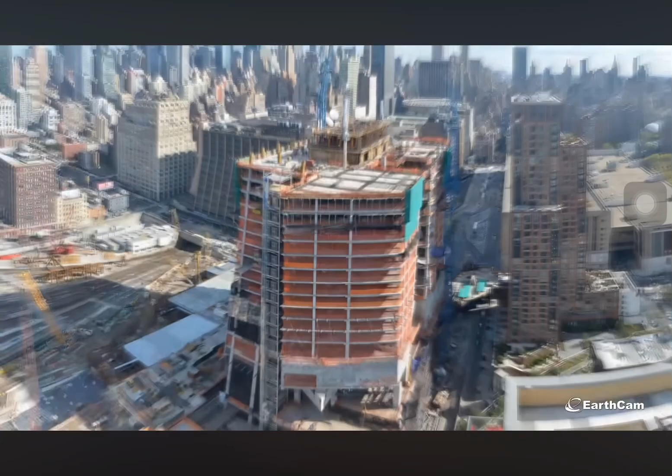Concrete has long been the foundation of modern civilization, from the bridges we cross to the buildings we live and work in. However, as our infrastructure ages, the challenges of maintaining and rehabilitating concrete structures become increasingly critical. Today, we are here to explore the transformative potential of the Future Concrete Rehabilitation Program, an innovative approach that addresses these challenges with cutting-edge technologies and sustainable solutions.

So why is this important? Concrete infrastructure represents a significant investment of resources and energy. Allowing structures to deteriorate not only poses safety risks but also has a profound impact on the environment. Current repair methods are often costly, labor intensive, and environmentally damaging. A revolutionary change is needed to ensure our infrastructure stands the test of time while aligning with global sustainability goals.

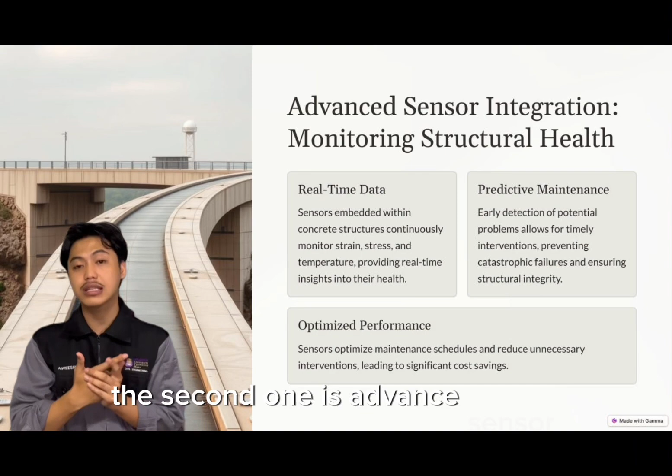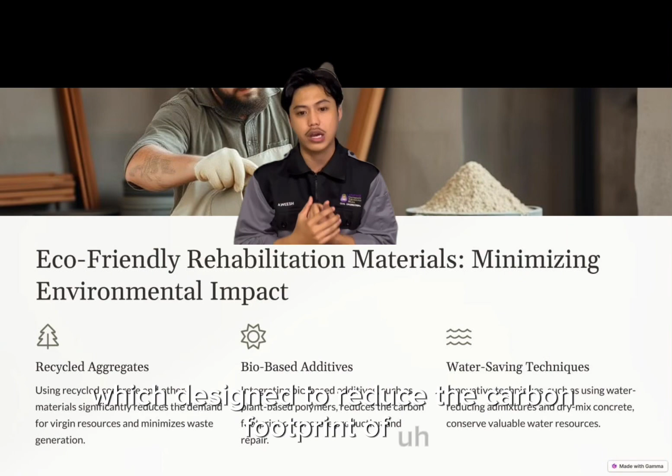In this presentation, we will cover three groundbreaking advancements in the field of concrete rehabilitation. The first is self-healing concrete technology, which repairs itself without human intervention. The second is advanced sensor integration, enabling real-time monitoring of structural health. And the last is eco-friendly rehabilitation materials, designed to reduce the carbon footprint of concrete repair processes. We will also discuss the societal and environmental consequences of adopting these technologies and how they align with Sustainable Development Goal 9, which is industry, innovation, and infrastructure. So let's get started by delving into the first revolutionary innovation, which is self-healing concrete.

For the introduction, self-healing concrete is a revolutionary technology that repairs cracks automatically, reducing maintenance costs and prolonging the lifespan of structures. As for the key innovation components, it uses bacteria or chemical agents that activate when cracks form in the concrete.

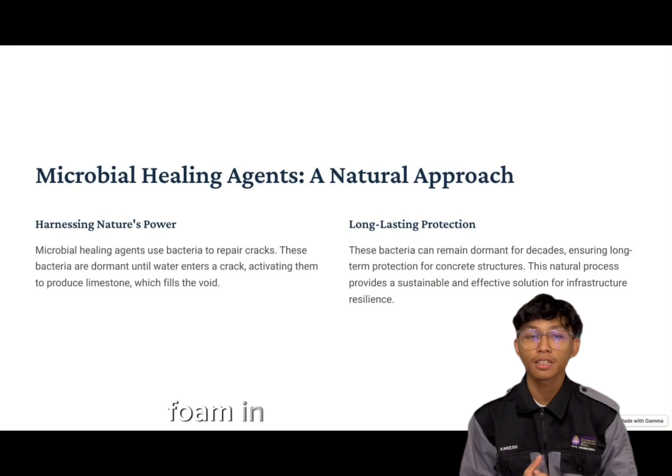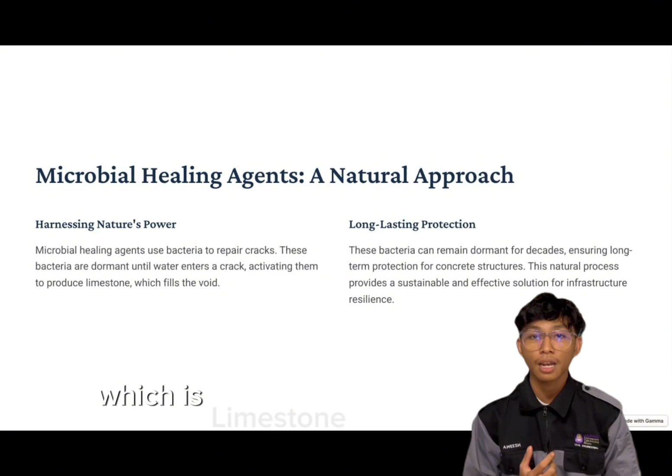Number 1, microbial healing agent, also known as the bacterial-based approach. When a crack forms and water seeps in, the bacteria are activated, consuming calcium lactate to produce calcium carbonate, which is limestone, filling the cracks. The advantages of this method: it is a completely natural process, and it prolongs functionality as the bacteria can remain dormant for decades until activated.

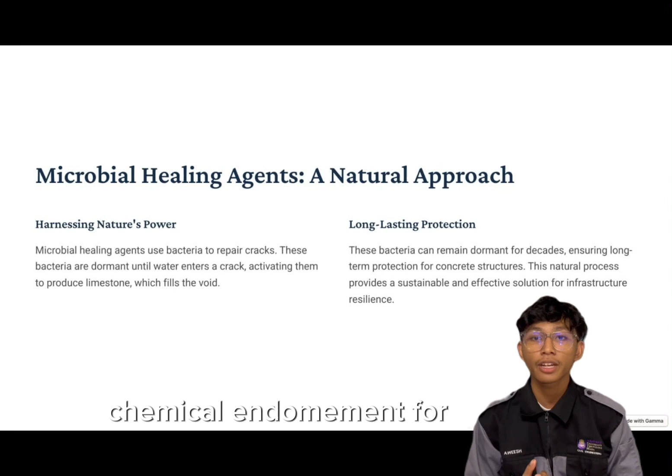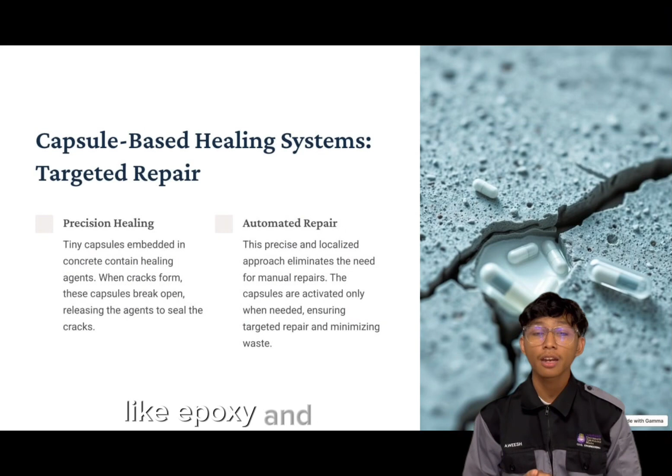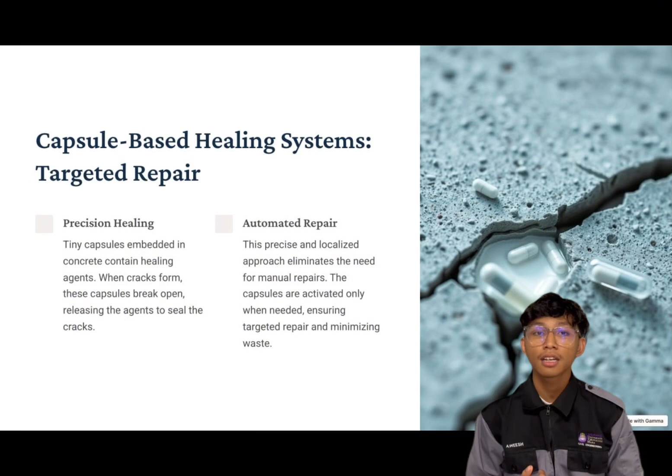Number 2, capsule-based healing system. How does this work? Tiny capsules filled with healing agents like epoxy are embedded, and when cracks form, the capsule breaks open, releasing the agent which reacts with water and other compounds to seal the cracks. The advantages of this method: it provides very precise, localized crack repair, and there's no need for manual application of repair material.

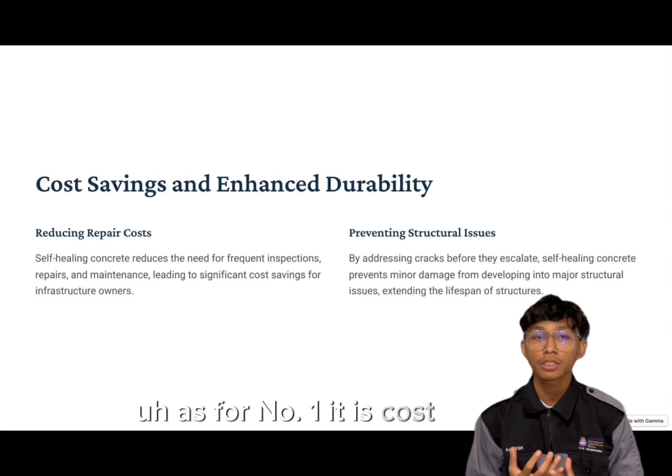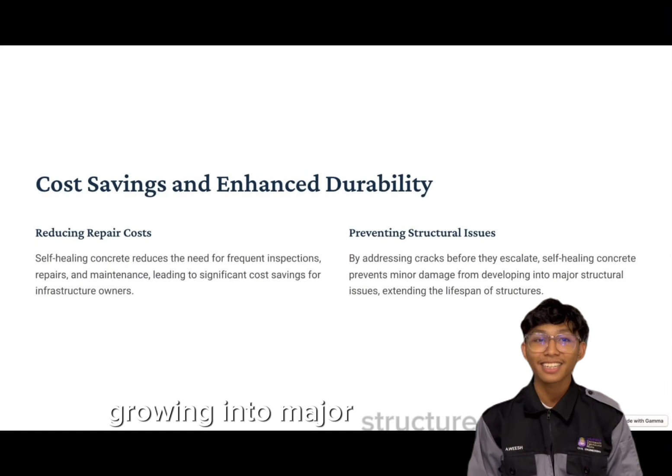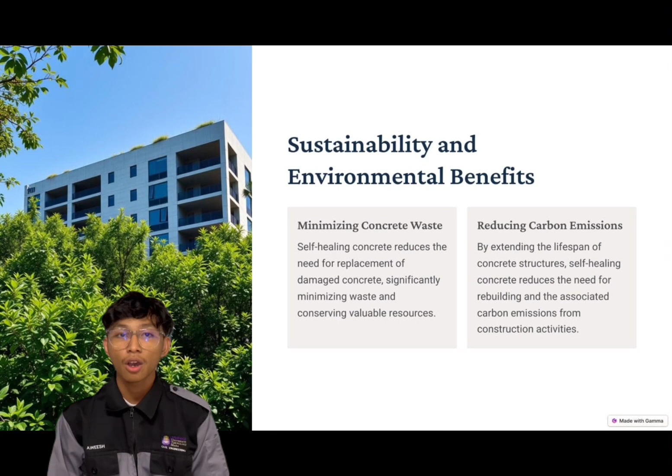Why are these innovations significant? Number 1, cost saving, reducing the need for manual intervention, inspection, and frequent repairs. Number 2, enhanced durability, preventing minor cracks from growing into major structural issues. Number 3, sustainability, which can reduce resource consumption by extending the lifespan of concrete structures. And lastly, environmental benefit, as this method can minimize concrete waste and reduce carbon emissions from repair activities.

That's all from me, let's move on to the next speaker. Let's now discuss how advanced sensor integration is revolutionizing the future of concrete rehabilitation. Smart sensors embedded into concrete structures enable real-time monitoring of critical parameters such as stress, temperature, and overall structural health. This technology provides engineers with invaluable data to ensure the reliability and safety of our infrastructure.

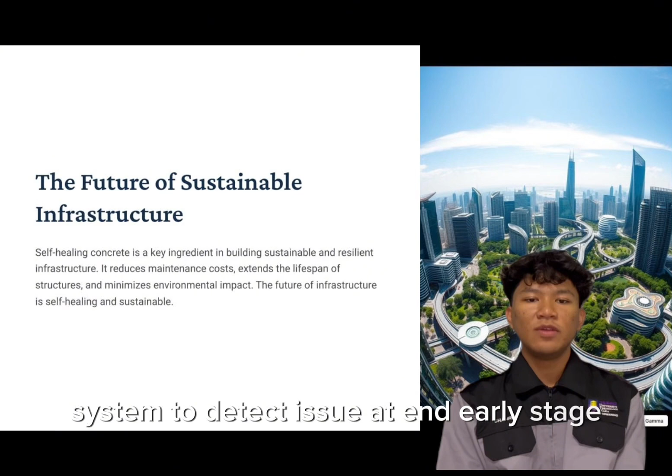How do these sensors work? They use IoT-based systems to detect issues at an early stage before visible signs of damage appear. By identifying problems early, predictive maintenance becomes possible, significantly reducing the need for costly and invasive repairs. These sensors are particularly beneficial in high-risk areas such as earthquake-prone regions, where early detection of stress points could prevent structural failure.

The impact of advanced sensor integration on society: in summary, advanced sensors are not just tools, they are the foundation of a smarter and safer future for our infrastructure. Thank you, and let's move on to the next speaker.

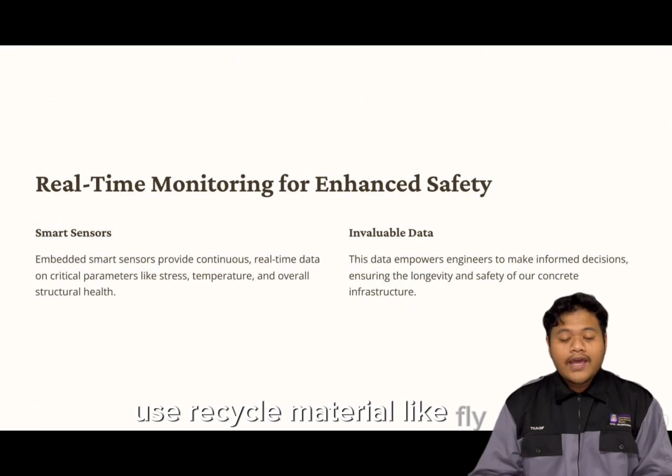Today I will talk about how sustainable materials in rehabilitation ensure minimal environmental impact, focusing on green concrete technology. Green concrete technology uses recycled materials like fly ash, recycled aggregate, and geopolymer concrete. This reduces the need for natural resources and cuts carbon emissions during production.

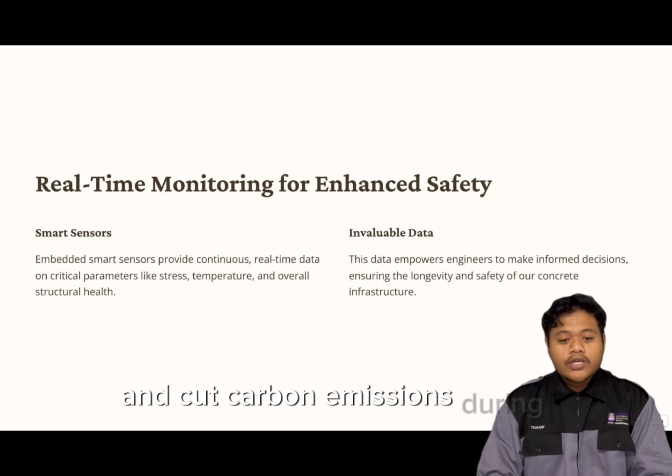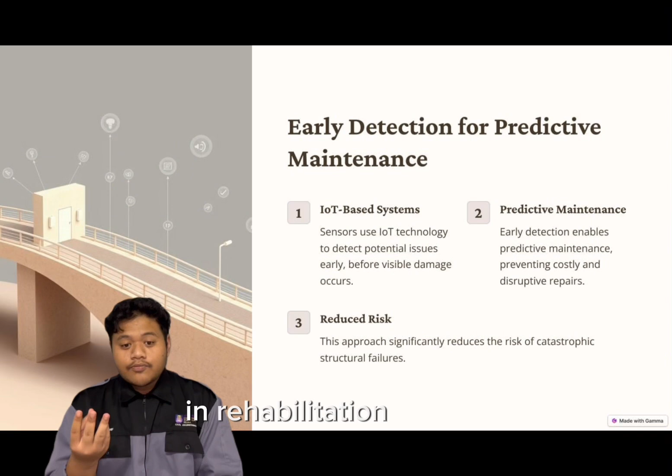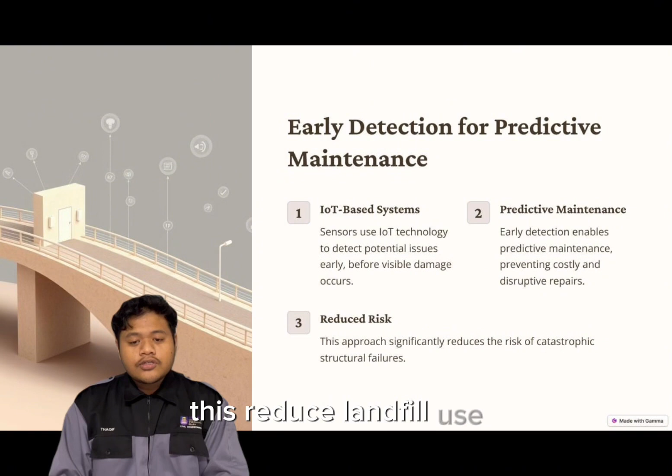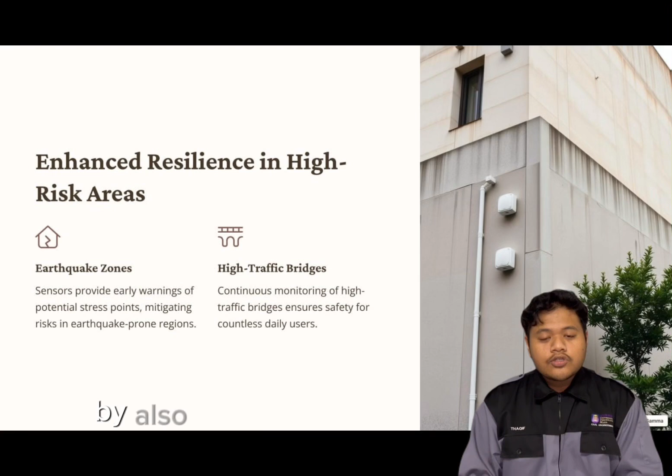Carbon capture technologies in concrete further enhance its environmental benefits. In rehabilitation projects, green concrete promotes a circular economy by reusing demolition waste as raw material. This reduces landfill use, lowers the carbon footprint, and conserves resources. By adopting green concrete, we are not just restoring structures but also reducing environmental harm and moving toward sustainable construction practices. Let's move to the other speakers.

I will present about collaborative implementation and future vision. Firstly, the need for updated construction codes and policy. Policymakers may implement codes that support the integration of smart building technologies such as IoT, automated systems, and advanced energy management. Secondly, training programs for engineers and contractors.

Engineers should participate in structured professional development courses to stay updated on new materials, technology, and best practices. This could be delivered through workshops, online platforms, or university partnerships. Policymakers can incentivize engineers and contractors to participate in ongoing education by offering tax benefits, subsidies, or professional development hours for attending accredited training programs.

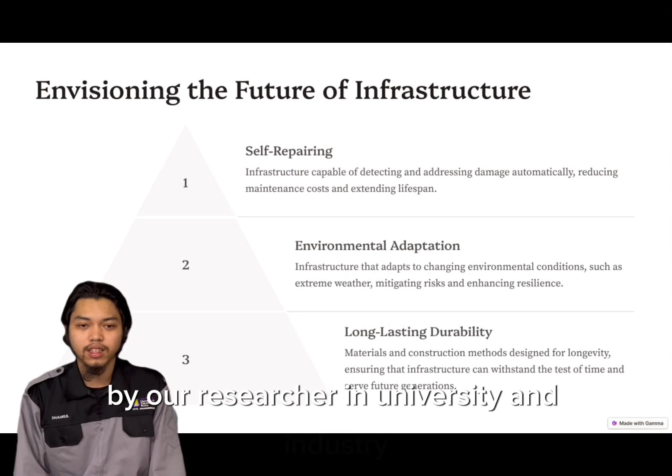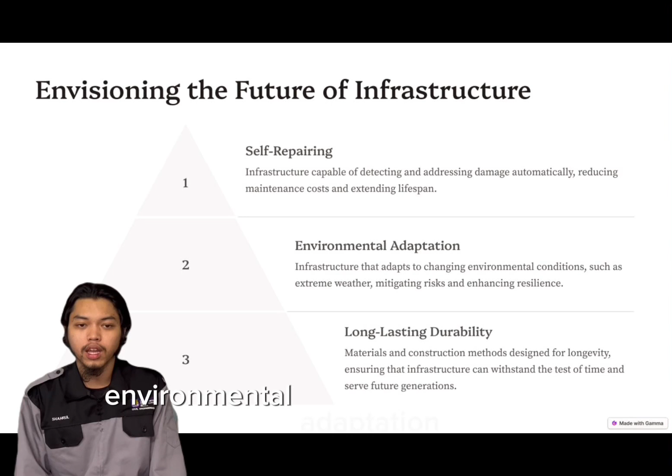Third, case studies of successful projects using future rehabilitation by our researchers in university and industry. On future vision, we hope infrastructure becomes far more advanced than today, capable of self-repair, environmental adaptation, and long-lasting durability. Imagine a world where our infrastructure repairs itself, adapts to environmental conditions, and lasts for generations.

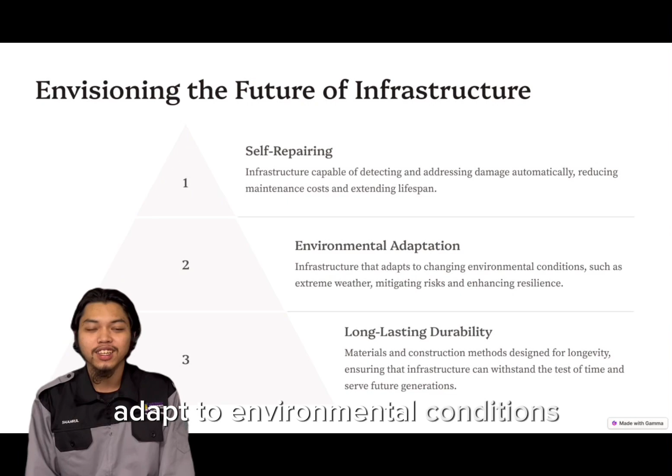So to conclude, the Future Concrete Rehabilitation Program provides an innovative and sustainable path forward for maintaining and strengthening our critical infrastructure, from self-healing concrete to advanced sensors and eco-friendly materials. These advancements promise a future where our infrastructure is not only more resilient but also more environmentally responsible. We must embrace these innovations and collaborate as engineers, researchers, policymakers, and stakeholders to turn this vision into reality. The future of construction is not just about building better, but about building smarter and greener. So let's work together to ensure a sustainable and safe future for generations to come.